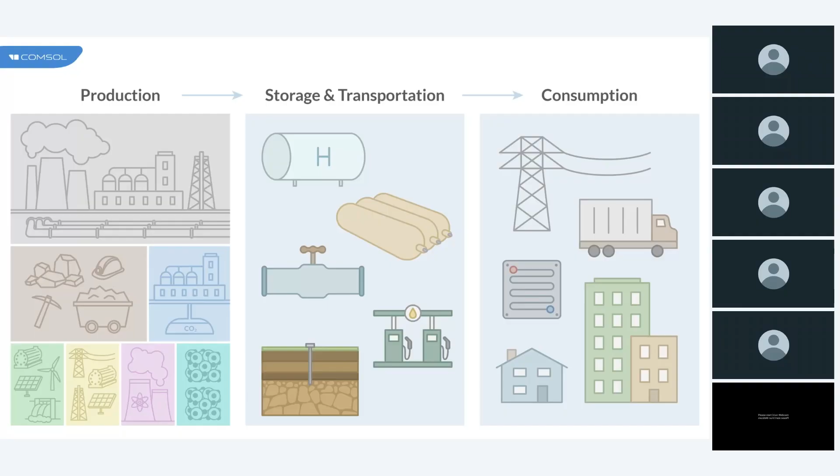There are different types of fuel cells and electrolyzers used in different situations, and each comes with its own engineering challenges. This is where multiphysics simulations become essential.

For example, proton exchange membrane fuel cells are widely used in vehicles and operate at low temperature, but require precise control over flow, water flow, and heat to avoid flooding and drying of the membrane.

In contrast, solid oxide fuel cells work at high temperatures for stationary power. Here we need to handle thermal stress, gas transport, and material degradation.

On the electrolyzer side, PEM and alkaline electrolyzers are used to produce clean hydrogen. They must minimize energy losses and prevent issues like shunt currents, especially under dynamic conditions.

No matter the system, we are dealing with complex interactions of physics: fluid flow, heat transfer, electrochemistry, gas diffusion, and even structural mechanics.

With COMSOL Multiphysics, we simulate all of these interactions together in one unified environment, which helps us design better systems, catch failures early, and reduce prototyping time and cost.

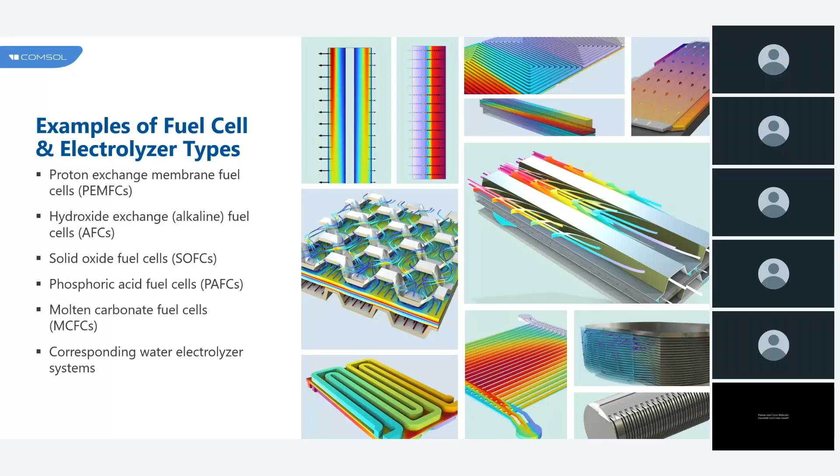For truly understanding and optimizing hydrogen technologies, we need to look at the full picture, from the microscopic reactions happening inside the membrane to the overall behavior of an entire fuel cell or electrolyzer stack. This is where COMSOL Multiphysics stands out, allowing us to model across different length scales, all within a single simulation environment.

First, the unit cell scale: here we zoom into the electrochemical core of the system, where simulation helps us analyze ion transport, gas-liquid reactions, species diffusion, multiphysics flow, and heat generation. We can visualize how each layer - catalyst, membrane, diffusion layer - performs under various conditions.

At the bipolar plate scale, we look at flow field design, optimizing gas distribution channels and pressure drops due to bending pipes, and checking whether flow is uniform or non-uniform. A good design here ensures uniform current density and avoids flooding or dry spots.

At the stack level, the highest level, we simulate the performance of the full fuel cell or electrolyzer stack.

Since modeling every detail at this level is computationally expensive, COMSOL uses smart technologies like homogenization and porous media approximation. This lets us study current distribution, heat and water management, shunt current, and thermal stresses at the stack scale.

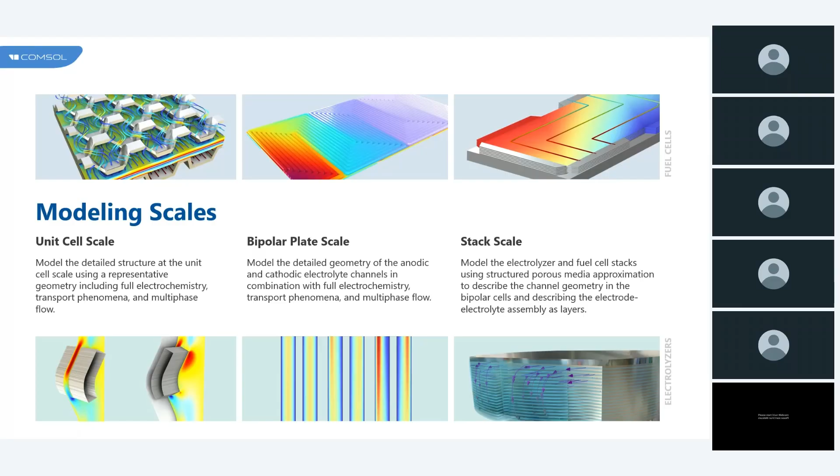Are you working on automotive applications like fuel cell or electric vehicles, or perhaps targeting stationary or power grid systems where fuel cells are used for backup and distributed power? Please select all that apply, and if your use case isn't in the list, feel free to share it in the chat. Your answers will help me tailor the remaining part of the session to what matters most to you. Please participate in that poll question.

Most of the persons have given their answer, and most people are using automotive applications. It's 53% of our audience, and 20 to 23% is stationary and power grid applications.

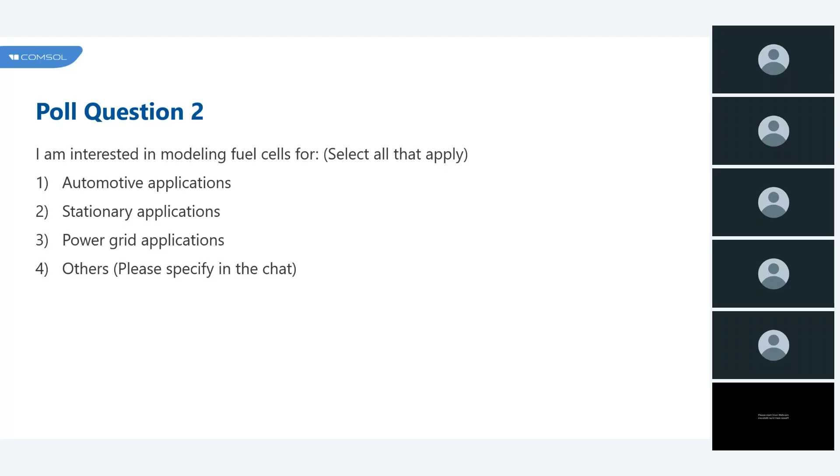Let's look at a common bottleneck in industrial hydrogen production, called shunt currents in alkaline electrolyzer stacks. Alkaline stacks, generally found in fertilizer plants, green steel lines, and hydrogen refueling stations, combine many cells that share the same potassium hydroxide electrolyte. That shared pathway makes the construction straightforward, but it also lets unwanted current bypass the intended electrochemical routes. This parasitic current cuts the efficiency of the electrolyzers, contaminates the hydrogen, and poses a safety risk, especially at high current and temperature.

COMSOL Multiphysics fixes that visibility gap. In one model we can build a full 3D 20-cell geometry. We couple ion and electron transport, gas-liquid flow, heat, and electrochemistry together in COMSOL Multiphysics and pinpoint exactly where the shunt current emerges and why. We can virtually test manifold shapes, isolation layers, and operating conditions before the hardware exists. The outcome is very clear: we need pure hydrogen, higher energy efficiency, safer operation, and a shorter development cycle.

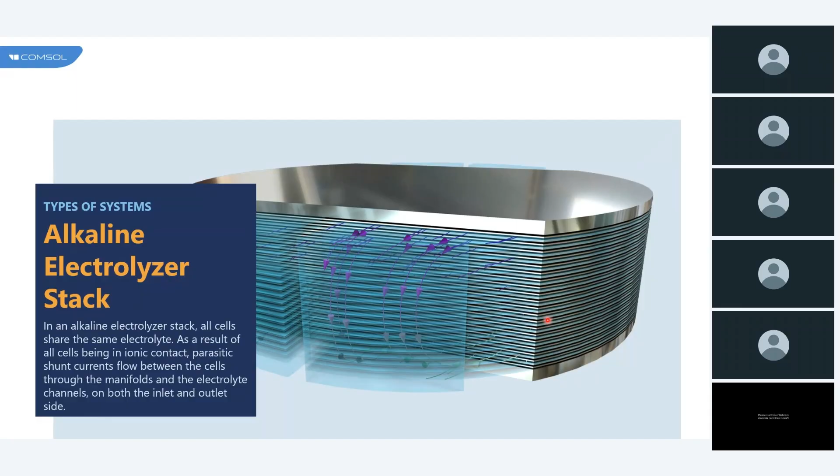Next we will walk you through how we set up that simulation, from the geometry to results.

Here is the full 3D geometry of our alkaline electrolyzer stack. It's a sequence of identical unit cells stretching in the x direction. We can see every layer: cathode, anode surfaces, and separator plates in between, bipolar plates are also there, and the inlet and outlet manifolds that carry the shared potassium hydroxide electrolyte. The geometry is critical because it dictates three fundamentals: how ionic and electronic current flow, the way hydrogen and oxygen gases leave each cell, and where heat accumulates under load.

With COMSOL, we can capture all of this in one model. We can predict hot spots where overheating might occur, detect non-uniform current densities across the cell, and locate where shunt current might form. By building a precise and realistic geometry, we are able to simulate actual behavior.

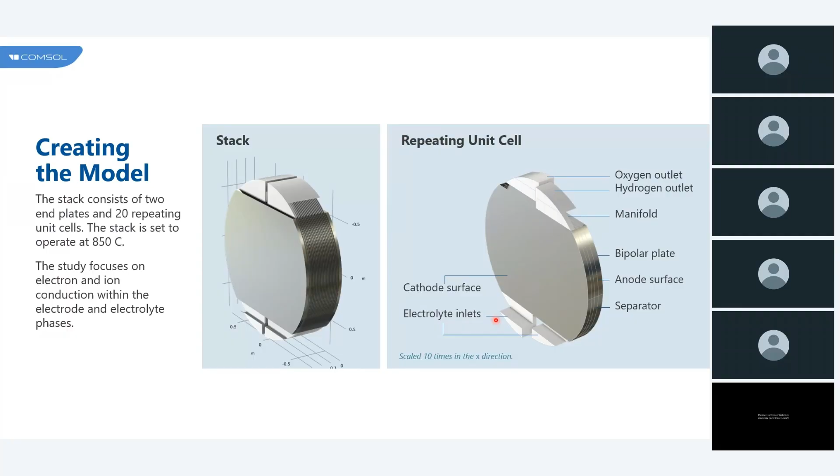Now that the geometry is in place, let's look at the results: current distribution, temperature maps, exactly where shunt currents appear, and how design tricks eliminate them. Now that we've set up the geometry, the next step is to look inside the stack at the electrical behavior that happens during operation.

In COMSOL, we model two main potentials: one is the electrode phase potential, and another is the electrolyte phase potential. The electrode phase potential drives the electrochemical reaction, and the electrolyte potential tells us how ions move through the liquid. By simulating both, we get a full map of where the reactions are happening and how efficiently the current flows.

Ideally, we want a uniform voltage gradient across all cells, but in practice, some areas resist current. These high resistance zones can lead to uneven reaction rates, localized overheating, and reduced energy efficiency. With COMSOL, we can pinpoint these weak hot spots and redesign components like electrodes and separators to balance the current and enhance durability.

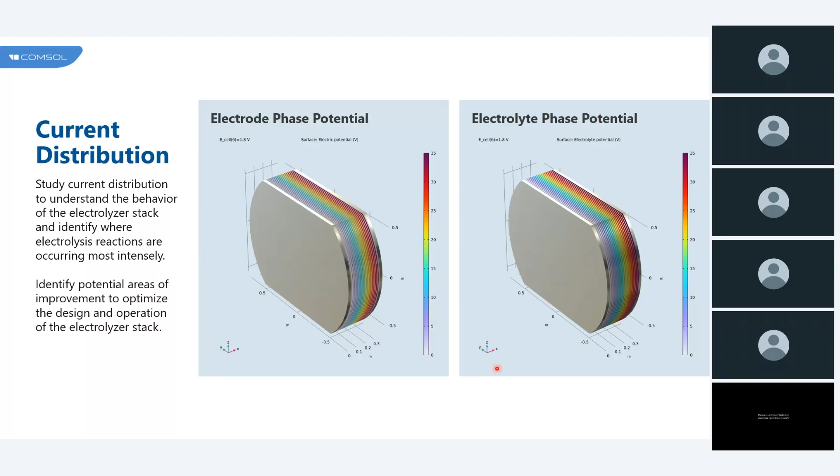This electrochemical modeling step gives us deep insight into the real behavior inside the stack, and sets the stage to study one of the most critical byproducts of the voltage imbalance, called shunt current.

With the electrode and electrolyte phase potential mapped, we can now focus on the major performance issue in the alkaline electrolyzer, called shunt currents. These are unwanted parasitic currents that flow through the shared electrolytes and manifolds, bypassing the intended electrochemical path.

In COMSOL, we simulate how stack geometry, electrolyte conductivity, and manifold flow distribution influence where shunt current forms. Results often show that the lower manifold channel is more prone to these losses, where the voltage gradients and flow paths overlap most aggressively. By adjusting design parameters in the simulation, we can predict and visualize exactly where these losses occur.

This happens well before physical testing, enabling engineers to redesign the manifolds, add insulation barriers, and mitigate unwanted current loops. Ultimately, this improves hydrogen purity, boosts efficiency, and enhances stack reliability.

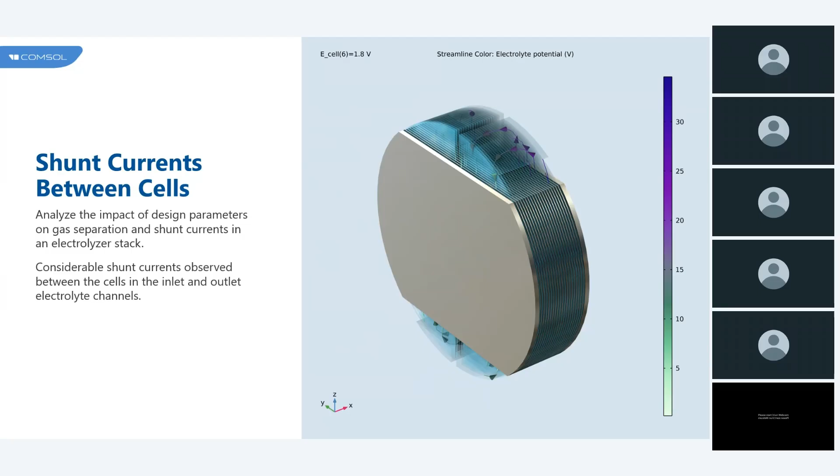Now that we understand where the shunt currents form, let's explore how they affect the overall performance of the system. To evaluate the performance of our electrolyzer stack, we focus on three key metrics. The first is the shunt current.

We track shunt current across each cell operating at 1.8 volts, and the highest shunt currents appear in the lower manifold channels, driven by the strong voltage gradients and uneven electrolyte conductivity.

Looking at Coulombic efficiency, this is lower at low stack currents, where the shunt current losses form a larger percentage of the total current. As we increase the stack current, Coulombic efficiency rises sharply, meaning more current goes toward actual hydrogen production.

Then we switch to energy efficiency. It starts low due to early shunt current and polarization losses, peaks around 1300 amperes where the system operates optimally, and then drops again at high currents due to ohmic and activation losses.

This performance curve gives us a clear optimal operating window, where efficiency, reliability, and cost are balanced. While alkaline systems offer proven performance, we can go further.

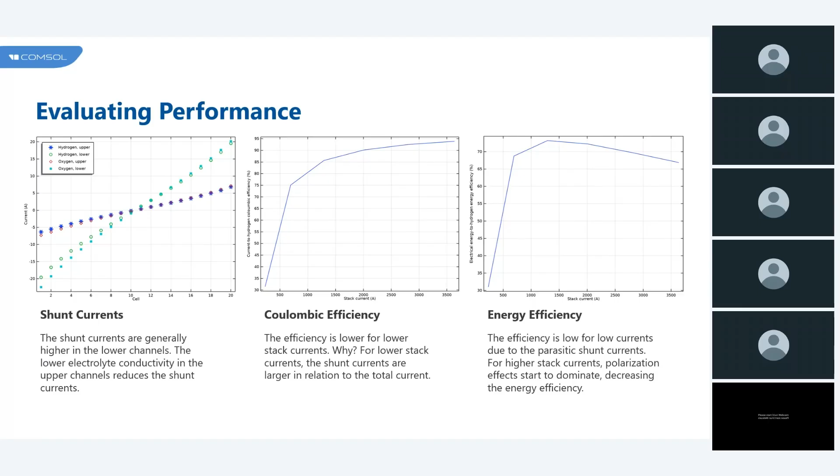To explore higher efficiency and integrated thermal operation, let's shift focus to solid oxide electrolyzer cells, or SOECs. These are emerging as a powerful option for industrial scale hydrogen production, especially where waste heat is available.

SOEC operates at around 800 degrees centigrade, using high temperature steam electrolysis to reduce electricity demand. This makes it highly efficient when integrated with a heat source like refineries, chemical plants, and renewable CHP systems. The ceramic electrolyte moves oxygen ions, not protons.

This means we can co-electrolyze steam and CO2 to make syngas, opening doors to synthetic fuels and chemicals, not just hydrogen.

But these benefits come with challenges: thermal stresses, material degradation, and complex gas flow also occur. COMSOL Multiphysics tackles all of this in one coupled model.

We can map thermal gradients and manage stresses, refine cell geometry to uniform the current densities, and predict long-term degradation and failure risk early, just like before a single part is built.

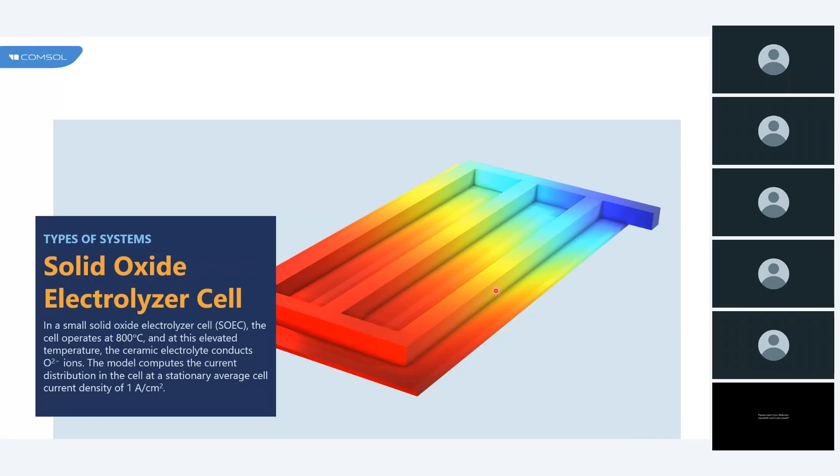Next, let's see how we construct these multiphysics models, starting at the unit cell scale. This is the unit cell model, where we explicitly define our anode, cathode, and solid oxide electrolyte layers.

Here we use ceramic membranes. Using COMSOL Multiphysics, we apply detailed boundary conditions, temperature-dependent material properties, and fully coupled physics to simulate ion conduction through the electrolyte, gas diffusion in the porous electrode, and electrochemical reaction at the interface.

This detailed setup lets us capture key outputs like local potential gradients, temperature fields, and gas species distribution. With this information, we can identify hot spots, non-uniform current density regions, and areas prone to degradation, providing critical insight for optimizing SOEC performance and durability.

Once the unit cell is modeled, we scale to the system level, tracking gas flow, velocity, and species transport under real operating conditions. Next we will see how velocity and gas composition profiles highlight performance trends across the cell.

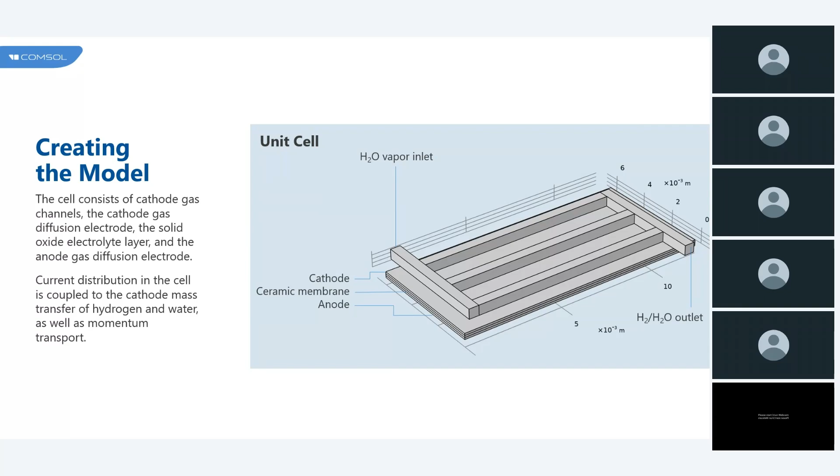Using COMSOL, we map the velocity magnitude distribution within the SOEC cell. Results show lower velocity in the three parallel flow channels compared to the inlet and outlet, which exhibit similar velocity magnitude due to the equimolar nature of the gas flow.

Next we track the molar fraction of the hydrogen and steam. This is the H2O in gas form, and the byproducts along the same path. This reveals how composition shifts as the gas reacts and migrates, and how those shifts influence the local current density.

At different feed conditions, like varying the steam excess or the hydrogen utilization, we observe strong interaction between reactant availability, partial pressure gradients, and reaction zones. These insights are critical for optimizing gas feed ratios, preventing performance losses, and ensuring high efficiency under realistic operating conditions.

Now let's examine how changes in the gas composition, particularly hydrogen concentration, can directly affect the reaction rates and overall cell performance.

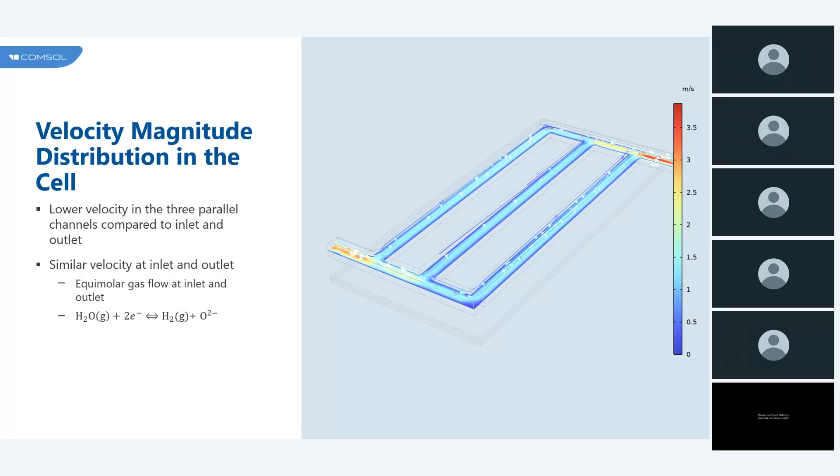This non-uniformity of gas composition and electrochemical activity can lead to performance degradation, uneven thermal and material aging, and lower overall efficiency.

To mitigate these effects, both cell design and system level control must be optimized by adjusting flow field geometry, diffusion layer properties, and reactant stoichiometry to maintain uniform operation.

This underscores the power of detailed multiphysics simulation in COMSOL, enabling better design decisions and improving long-term durability and efficiency of the SOEC.

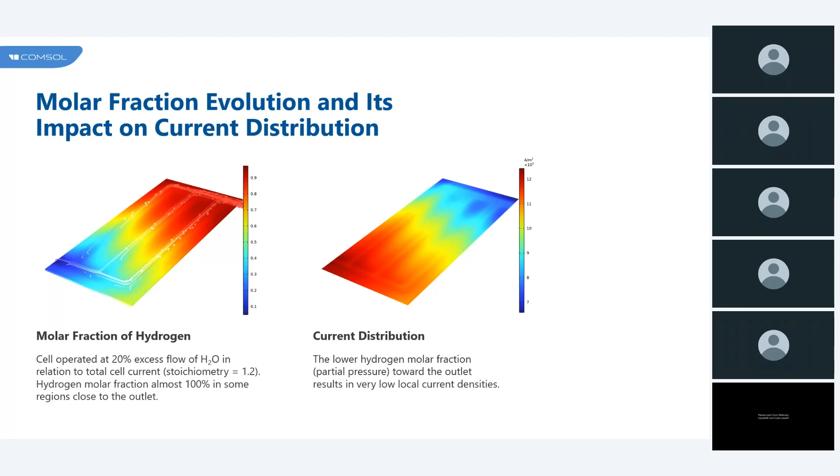Next we will examine how gas composition shifts also influence thermophysical properties and why accurate modeling of this effect is critical. In high temperature systems like SOEC, gas properties like density and viscosity change significantly as the hydrogen and steam ratio evolves along the flow path.

This shift affects the flow velocity and pressure drop, species transport inside the porous electrodes, and overall fuel delivery and reaction efficiency.

If we ignore these effects, we risk underestimating fuel starvation, local pressure buildup, or transport limitations. With the help of COMSOL Multiphysics, the gas properties are dynamically linked to real-time composition, making the model more accurate and predictive.

Having explored hydrogen production with the SOEC...

Let's now shift focus to hydrogen utilization, starting from the PEM fuel cell performance under dynamic and non-isothermal conditions.

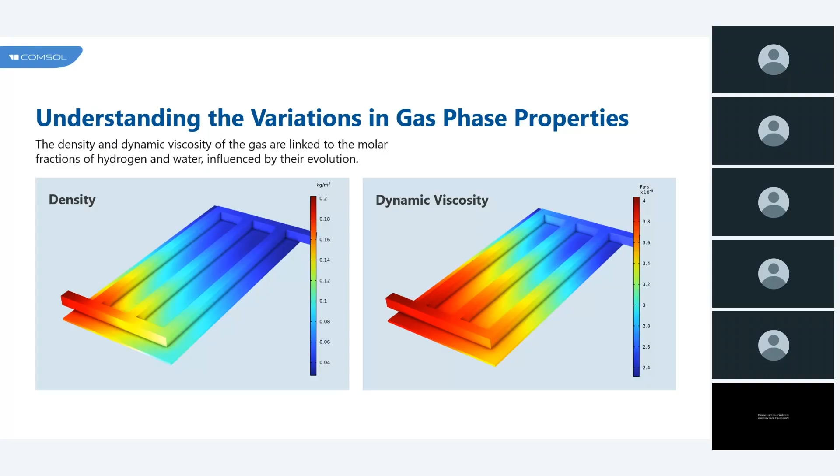This is our third model type. In the first, we saw only the electrochemical part. In the second, flow was included. Now we are doing multiphysics modeling, with electrochemistry, fluid flow, and heat transfer also included in the non-isothermal PEM fuel cell.

Imagine this fuel cell car driving on a hot summer day, and when the driver presses the accelerator, the car needs more power. The fuel cell has to work harder, which means it makes more heat and more water inside.

The heart of the fuel cell is a thin membrane that conducts the hydrogen ions, but this membrane is very sensitive. If it gets too dry, it can't move ions easily and the power drops. If it's too wet, water can block the flow of gases and the reaction slows down.

Keeping the right balance of water and heat is very important. That's why we use COMSOL Multiphysics simulation that includes heat transfer to see how the cell heats up, and water movement, including the water being pulled by the ions, that is the electroosmotic drag.

Another effect is back diffusion, which is the water moving back to balance the sides, and water leaking through the membrane, that is called permeation.

These coupled effects show how temperature and humidity evolve during load changes and how they affect the reaction zone. With this insight, we can optimize humidification strategies and improve thermal controls, and design a PEM fuel cell that stays efficient even in real world driving conditions.

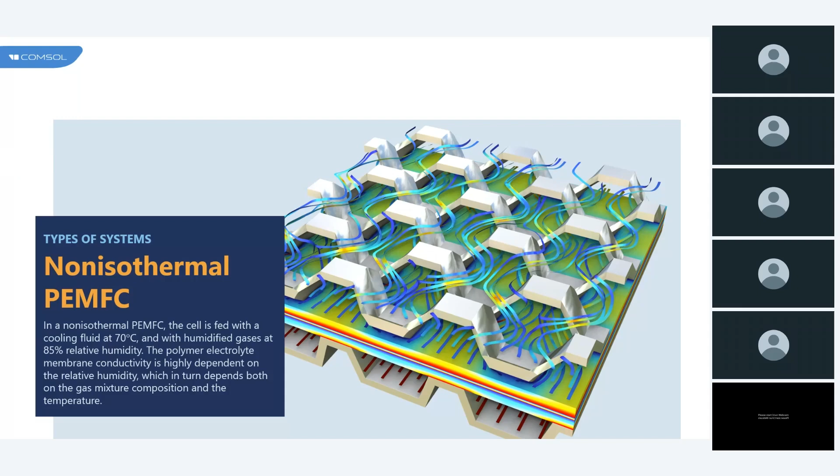Now let's explore how we build this detailed multiphysics model in COMSOL. Again, we create the understanding of the PEM fuel cell in detail.

We model every critical layer in one COMSOL model. This is the membrane electrode assembly, called the MEA, where the electrochemical reactions occur.

Another one is the cathode GDL and anode GDL, the gas diffusion layer, to move gases in and liquid water out. Flow channels distribute the reactants uniformly, and cooling channels remove excess heat under load changes.

So all these parts interact, so we use a fully coupled multiphysics approach, including heat transfer, gas and water transport, and electroosmotic drag. This unified model predicts the power output and maps the temperature and humidity inside the cell, showing how those conditions affect proton conductivity and overall efficiency. With these results, engineers can fine-tune the material, layer thickness, and channel geometry for designing PEM fuel cells that run cooler, stay hydrated, and last longer.

Now that the complete cell is modeled, let's examine the key electric behaviors, specifically how voltage varies across the different layers and what that means for performance.

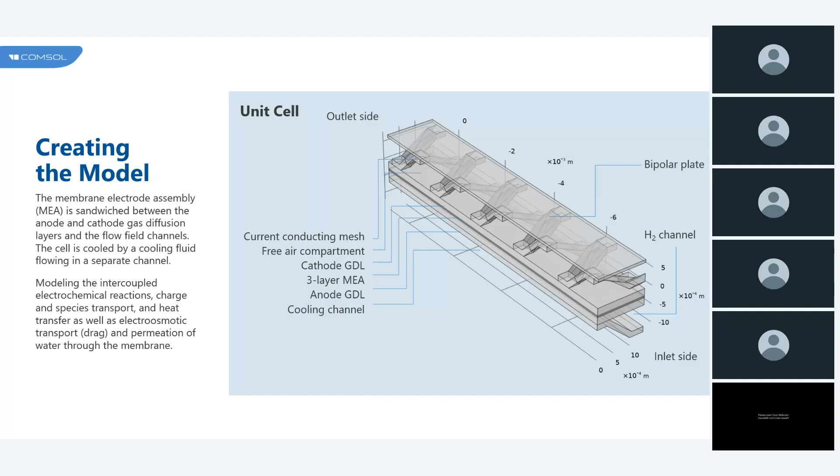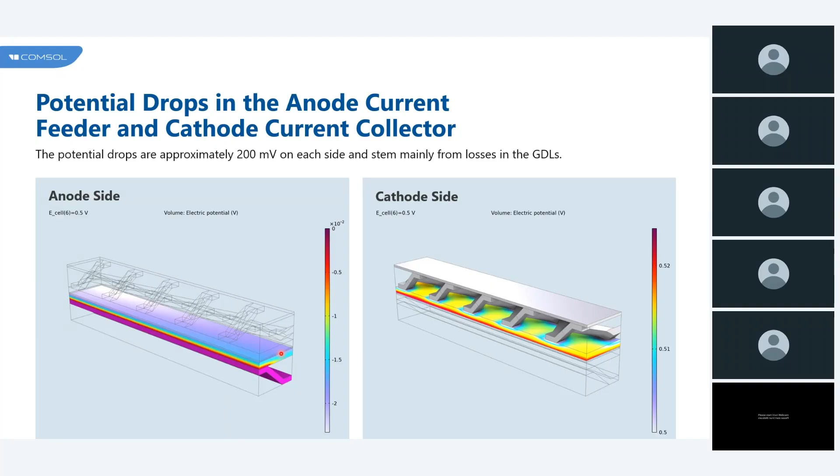Besides these electric losses, heat builds up inside the fuel cell, which plays an important role in its performance and durability. Let's see what the model reveals about the temperature distribution.

If we don't manage this heat well, it can dry out our membrane and damage it. This causes uneven current flow, making the fuel cell wear out faster. By studying both the electric and thermal details, the model helps us design better cooling paths, choose materials wisely, and build more reliable fuel cells.

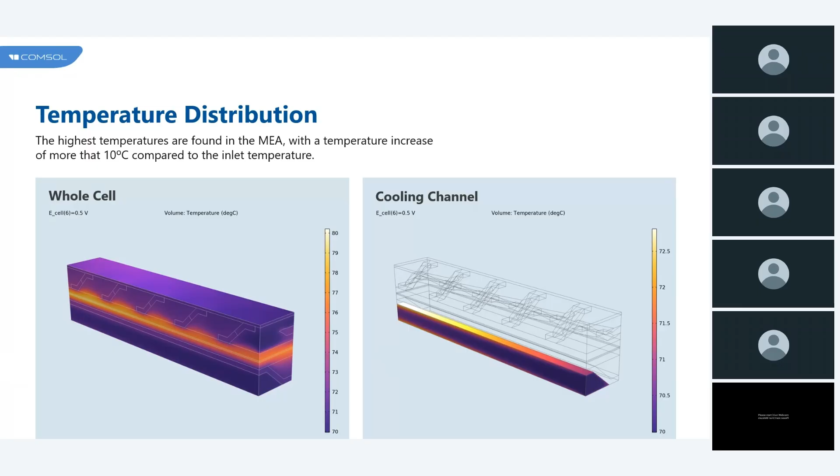Understanding this is key for designing humidification systems and flow field layouts. By knowing how water builds up inside the cell, engineers can adjust the gas flow, modify the channel design, or change operating conditions to keep the fuel cell working efficiently and avoid problems like flooding or drying out.

So far we have focused on the single cell PEM fuel cell, but in real applications, cells are stacked together to deliver higher power, which brings new challenges, especially with temperature and water management across the whole stack. This is our fuel cell stack.

When multiple PEM fuel cells are stacked, keeping each cell at a similar temperature is very important. If some cells run cooler or hotter, water vapor condenses unevenly, causing performance differences that lower stack efficiency and reliability. Cooler cells can be flooded with water, blocking the oxygen needed for reactions, while hotter cells may dry out, damaging the membrane over time. These problems shorten the fuel cell stack's lifespan.

To address this, we use COMSOL Multiphysics to model a detailed 5-cell stack, including heat generation, water and gas movement, cooling flow, and electrochemical reactions. We tested different flow designs like straight, serpentine, and bio-inspired patterns, and the results show which layout spreads heat evenly and improves water management.

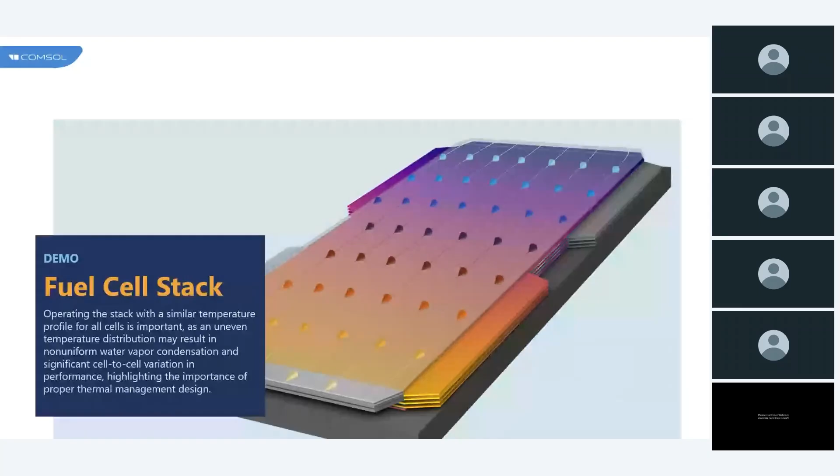Now that we have seen the importance of temperature and water balance in the fuel cell stack, let's look at how we model this complex interaction in COMSOL. Before starting our demo, we'll showcase some results showing what actually happens inside that fuel cell stack.

So this is the model which is representing the 5-cell PEM fuel cell stack, and each cell is separated by the bipolar plates that also serve as channels for liquid cooling.

Inside COMSOL, we simulate several key processes all at once, including the temperature changes inside the stack, electrochemical potential in both the electrodes and electrolytes, mass transport of gases like hydrogen, oxygen, and water vapor or steam in each compartment, and fluid flow and pressure in both the gas and cooling channels.

The COMSOL Model Builder makes this workflow smooth. It brings together geometry setup, physics definition, meshing, solving, and visualizing the results in one place. This multi-physics approach helps us better understand how different parts of the stack interact, so we can make better design decisions and build a more efficient, longer-lasting system.

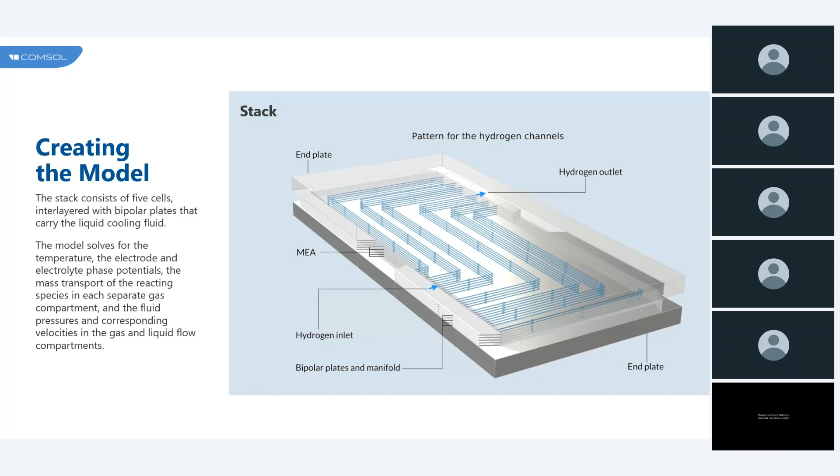So this is what our COMSOL looks like. Give me permission to share my screen again. So this is our COMSOL GUI.

So when we started our COMSOL Multiphysics GUI, here we can see the example of the stack cooling PEM fuel cell.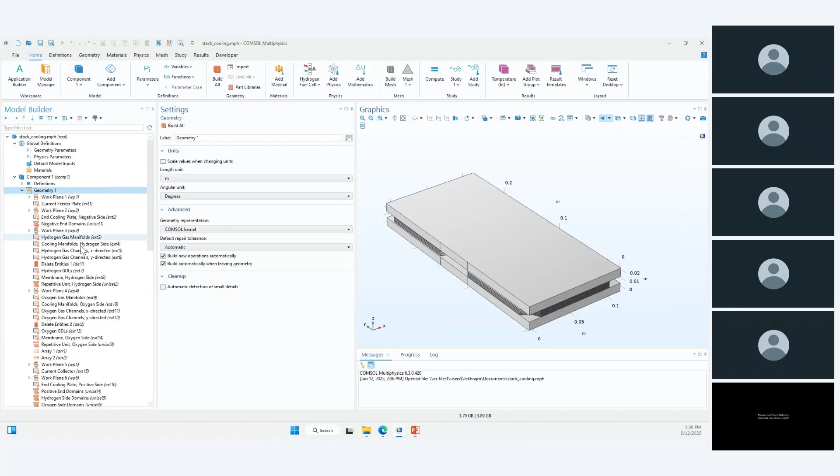In the geometrical parameters section, we can put all our parameters here, and we use the same thing in the geometry section. This geometry is built in COMSOL itself.

If you want to import your geometry from any CAD software, we can directly import it from another CAD tool. So I will showcase that.

When COMSOL launches, our GUI looks the same, and you can either go with the Model Wizard or the Blank Model. Generally we select the Model Wizard.

In the Model Wizard, you choose which kind of fuel cell or which kind of modeling you want to do, from 3D to 0D. For now I choose 3D, and for the PEM fuel cell I want to use fluid flow, the multi-phase flow.

In the multi-phase flow, I have two-phase flow in the phase field, so I choose the phase field here. This is the laminar flow, and I want heat transfer too, so I choose heat transfer from the non-isothermal flow, and my model will be ready.

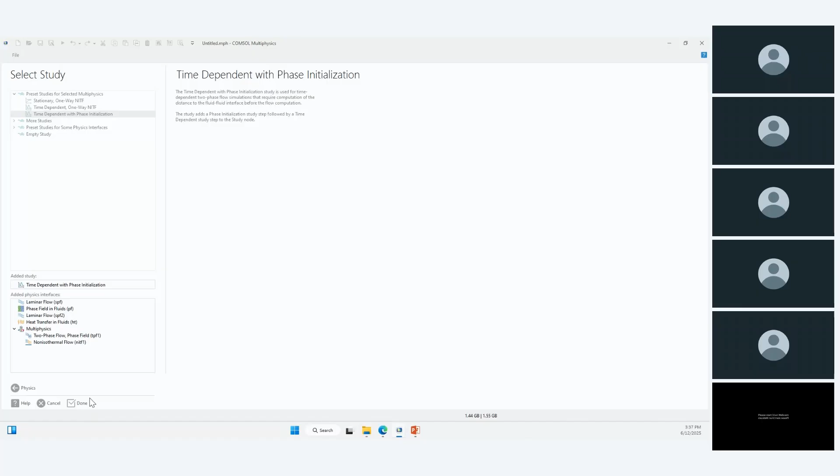After the physics are selected, we go on to select the study, whether it's time-dependent or stationary. I choose the time-dependent study with phase initialization, and after that we click Done. With this, our initial GUI looks like this.

Initially your parameters are not estimated yet. If you want, you can either directly import from any CAD file, or we have different kinds of models we can directly import from other CAD tools.

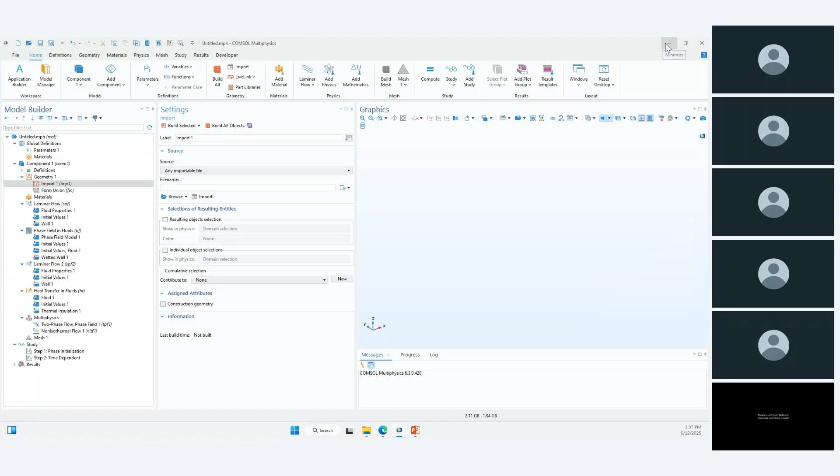After the model import, you can build the geometry. After building the geometry, we have to assign our material.

For materials, COMSOL has a dedicated library. You can choose directly from battery, electrolyzer, electrode kinds of things, or a dedicated fuel cell library is also available. In the fuel cell library, aqueous alkali, molten carbonate, polymer electrolyte, and solid oxide are all available, so we can choose material directly from the library.

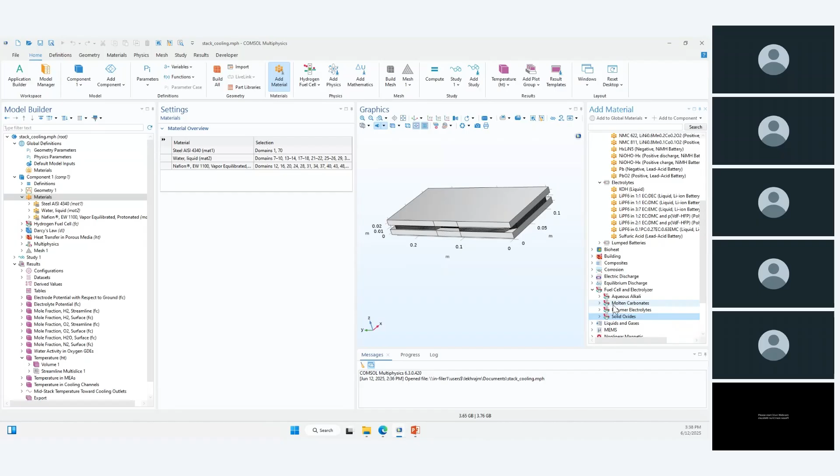For now we are choosing steel as the outer body, water liquid inside our membrane, and one is Nafion, vapor equilibrated. So that's how we choose the material.

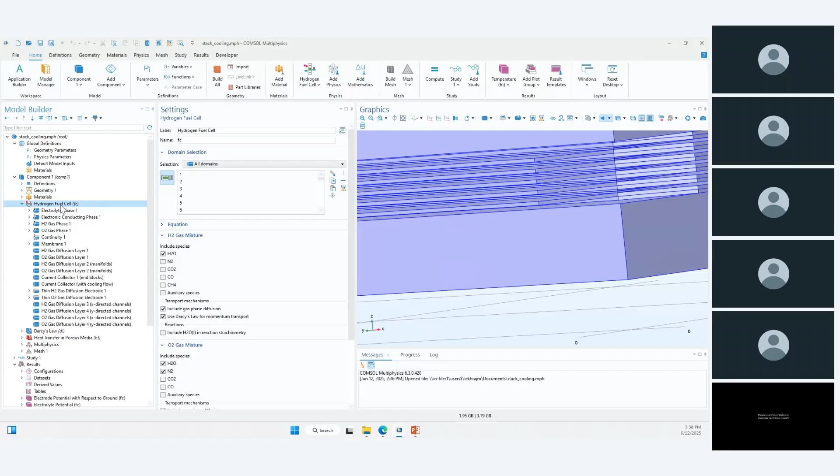After choosing the material, we select our physics. One of the physics we're using is the hydrogen fuel cell, which allows the electrolyte phase, and which kind of electrolyte is here. From the zoom we can see we're choosing the stacks, and you can see it clearly here.

To edit anything, like the electrolyte conductivity, from the material - whatever material you choose and assign, it comes directly from the material, or you can change it by user-defined input instead.

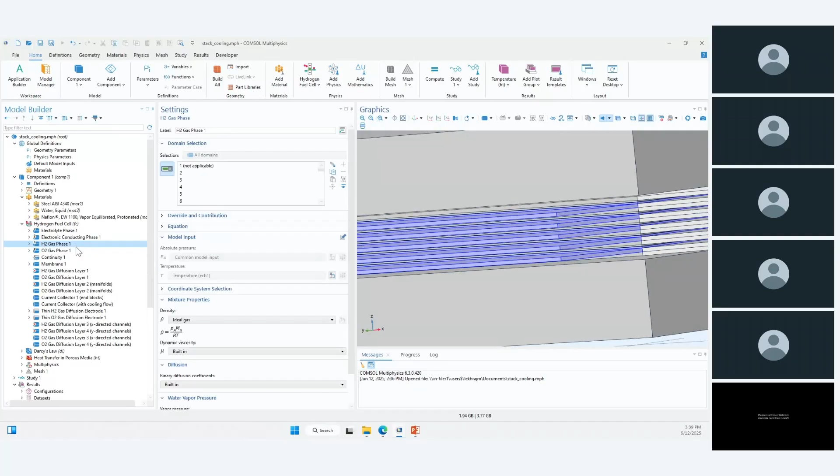After that, electronic conducting phase, and which kind of hydrogen phase - H2 - and oxygen we can assign in the physics term. This is called the graphics window.

In the middle is the setting window, and this is our model tree builder. So after setting up the hydrogen fuel cell physics, we look like we just need pressure only.

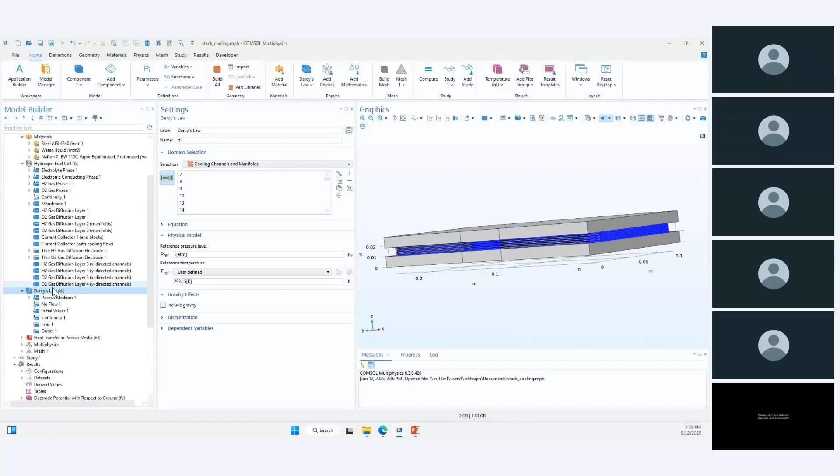So for the pressure, we have to solve Darcy's law because our membrane is porous. That's why we are choosing the porous medium. So I have to select the porous media, where is the fluid, where is our membrane. So we can choose directly by Darcy's law.

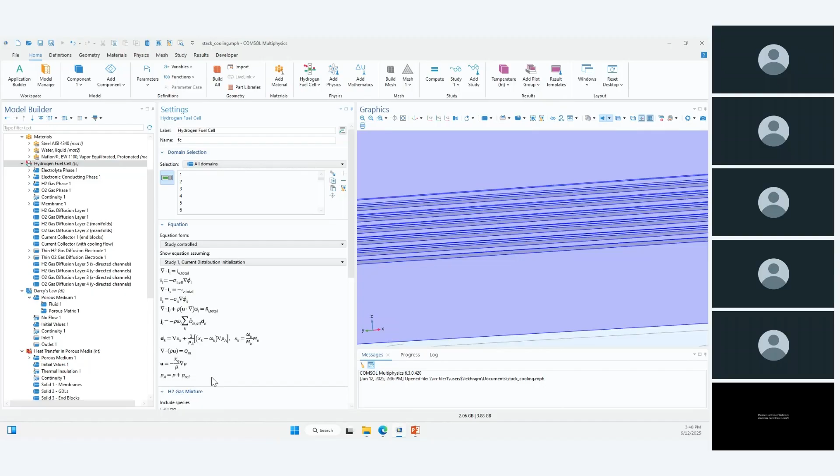And I need to see the heat effect also, and heat effect is in the porous media. So we have dedicated physics to solve in the porous media, and which equation is solved by COMSOL we can see directly. So here is our equation for the hydrogen fuel cell, which kind of equation we have to solve, and similarly for Darcy's law we can see which kind of equation we have.

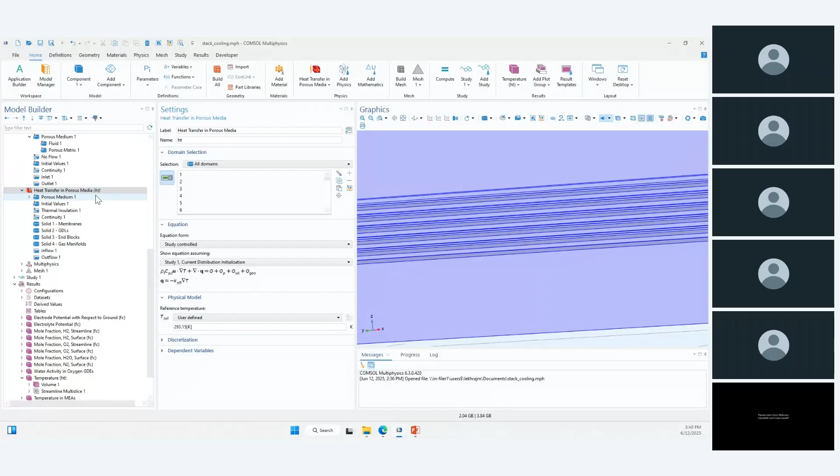So this is the part of the physics. In the heat transfer, again we can see our equation, which kind of energy equation is solving in the heat transfer in the porous media. For the porous media, we have a dedicated node which allows you to select where your porous media is, we have to assign it. And we can see the name - this is our membrane, GDL, and end blocks. This is in the end.

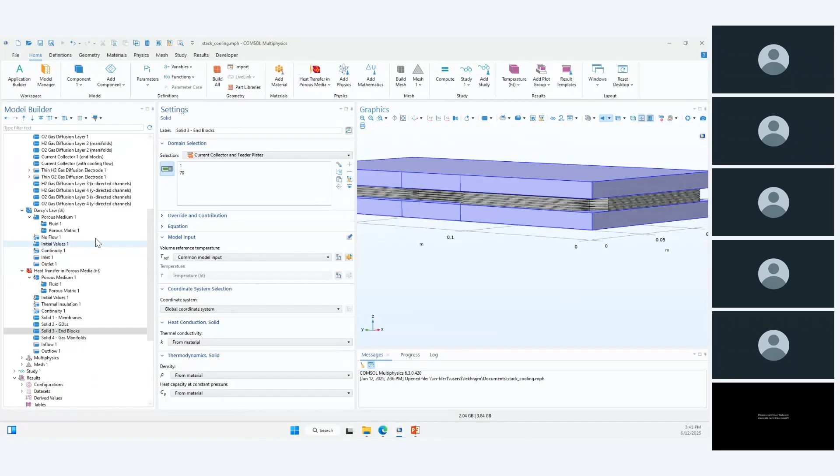So after setting up this geometry, material, and physics, we have to select the multiphysics nodes. In the multiphysics, we see which equations we are solving together. So first we can see the coupled interface - one is the electrochemical solved together with the heat transfer. So we select the electrochemical physics, and here is the heat transfer. With the coupling of both, either it will be one-way coupling or two-way coupling, we can do the same thing.

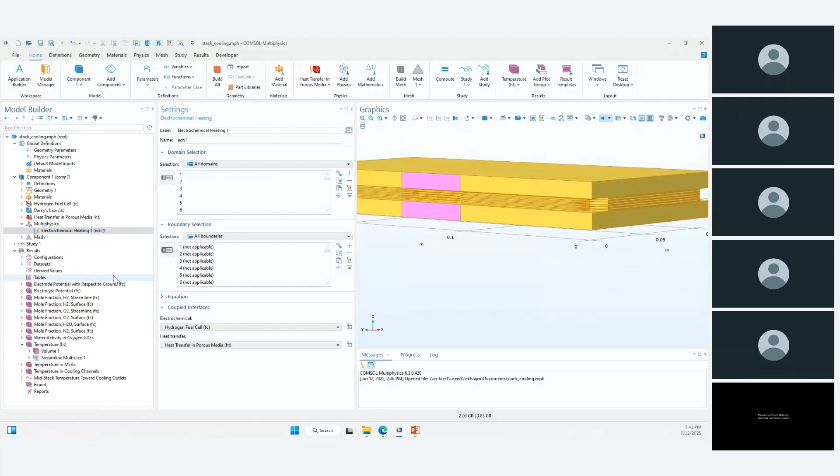And in the geometry parameter, I showed you earlier. So in the setting we can see the parametric study also. In the parametric study, we can solve the parametric sweep. This allows you to choose which kind of parameter you want to sweep.

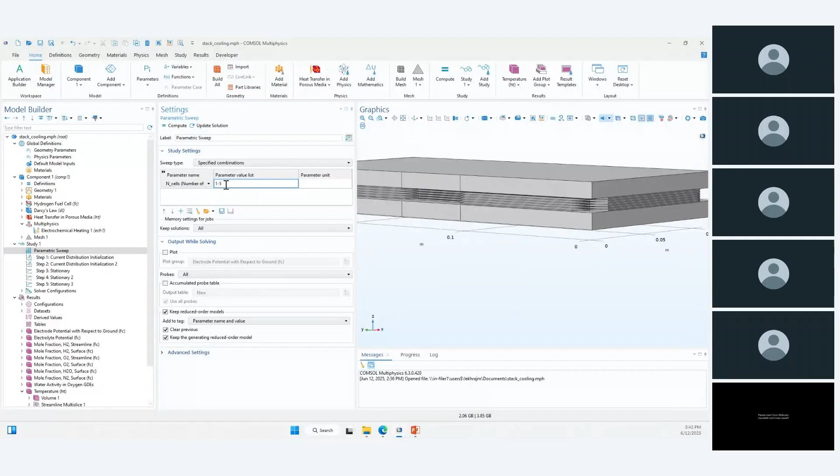Suppose our unit cell thickness - if this unit cell has n number of cells, say 5, we need to change the number of cells to 5. So we just type here, n_cell is number of cells, so I want to check from 1 to 5. COMSOL itself gives the result for number of cells 1, 2, 3 up to 5. So we have to define that. This is called the parametric sweep.

And mesh count also plays an important and crucial role in any software. So COMSOL gives you the option of user controlled mesh and physics controlled mesh. If you select physics controlled mesh, COMSOL takes care of all physics based controlled mesh. So we can do the mesh.

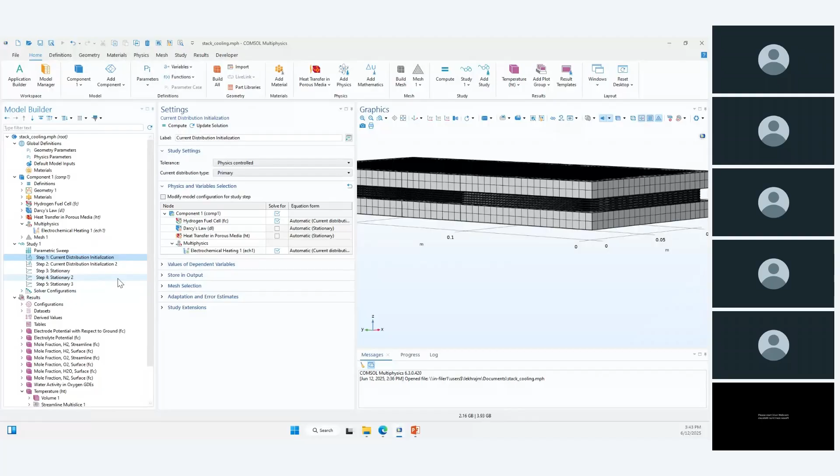After the meshing, we switch on the study. In the study, the first study is for the current distribution. So here we are doing the stationary solving, and we do not go into the solver settings, we just jump to the result. Post-processing itself happens in COMSOL itself. So we can see here the electrode potential with respect to the ground.

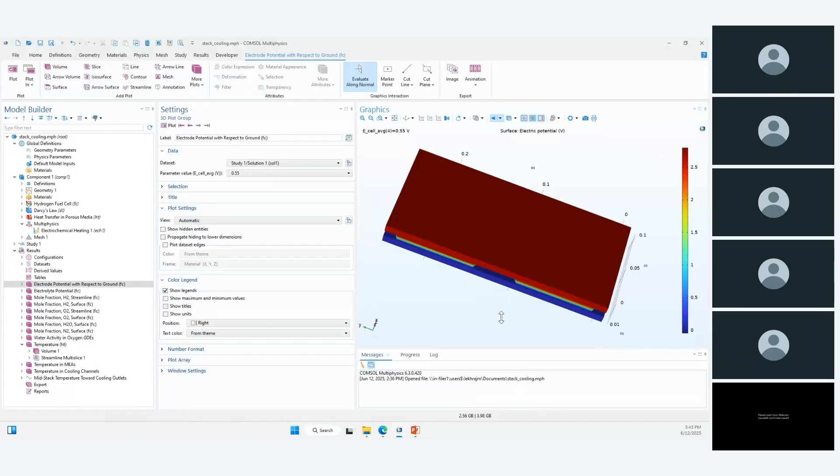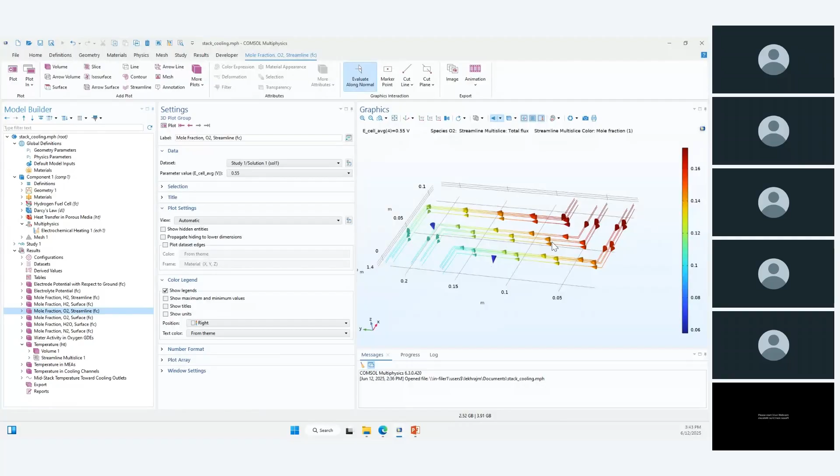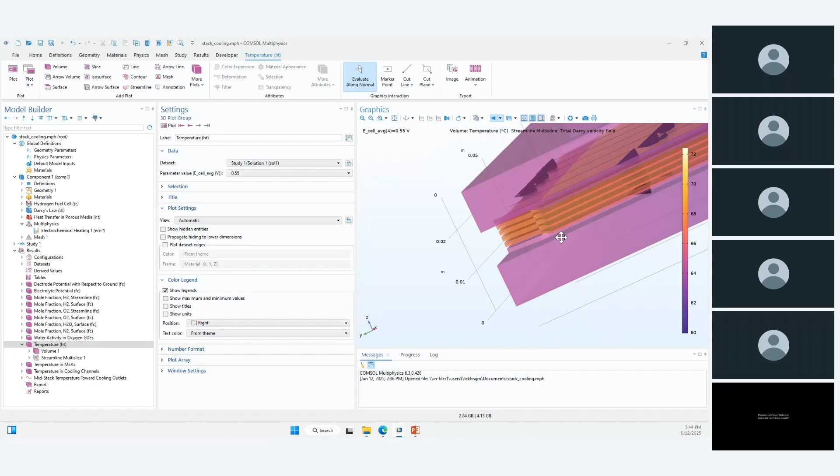And water activity in the oxygen, we can also see in the post-processing results. Temperature plays a very crucial role in it. So we can see which kind of temperature is in every stack cell, starting from here to here, from inlet to outlet. We can see which kind of temperature we are getting, and in the cooling channel, what is the status of the temperature. So we can see this in the post-processing itself.

So for the fuel cell stack modeling, this is a very big advantage. We can see easily, including complex features like porous electrodes, gas diffusion layers, and cooling channels. We also couple multiphysics like heat transfer, electrochemical reaction, gas transport, and fluid flow within the same model. So the platform supports parametric study too.

Like I told you earlier, things like flow rate, channel size, or material properties can be changed without rebuilding the model from scratch. Once the simulation runs, the post-processing tool allows you to create clear visualizations like temperature maps, current density plots, or flow streamlines that reveal what's working and what needs improvement. So this is a flexible all-in-one workflow which saves time.

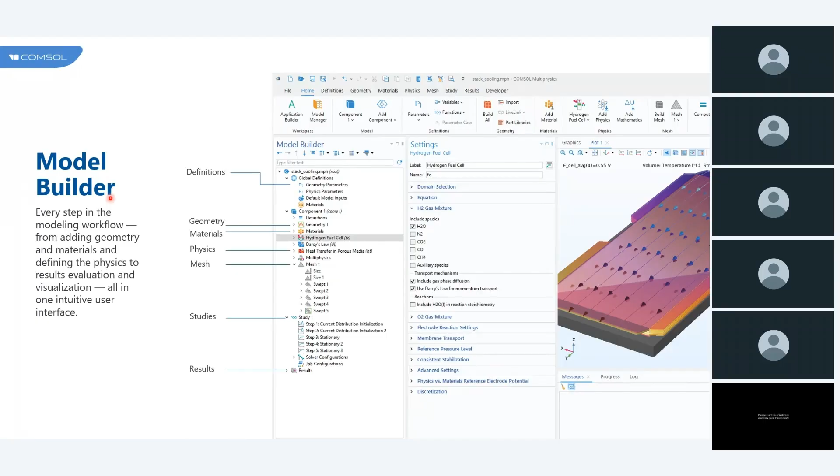One of the biggest advantages of simulation is being able to test and refine designs virtually, without having to build multiple physical prototypes. For example, imagine an automotive company trying to reduce the weight of a fuel cell system without losing thermal performance, instead of manufacturing several versions of the cooling plate. They use COMSOL to simulate different geometries and flow paths to save both time and cost.

In electrolyzer development, researchers have also used COMSOL to explore how membrane thickness and electrode structure affect gas crossover and efficiency. This kind of insight helps guide material choice before anything is built.

Simulation isn't just about design, it's also about durability. We can virtually test how the system responds to rapid cycling, start and stop conditions, and stream loads, helping engineers catch reliability issues early. This kind of virtual prototyping shortens the development cycle, improves product reliability, and accelerates innovation.

Now that we've seen how simulation helps us optimize individual fuel cells and stacks, let's look at how this approach is accelerating innovation at the industry level. We have one of the user stories I told you before, from the auto industry, because many of us are interested in the auto industry. So here's how Toyota is using simulation-driven design to rethink fuel cell technology.

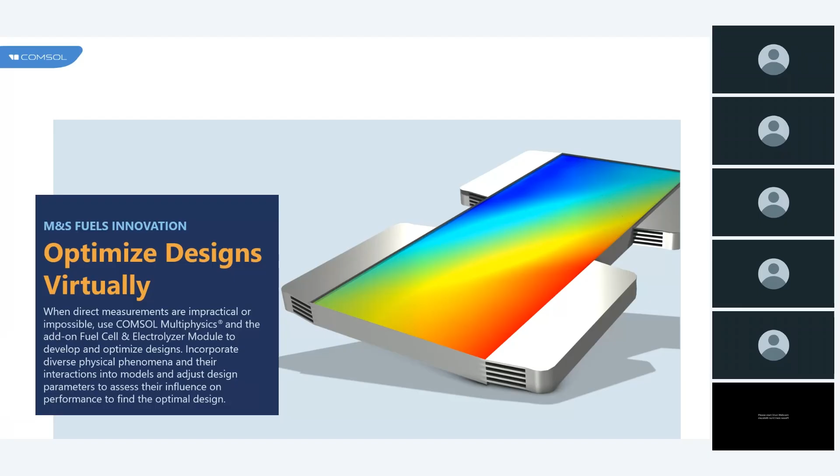Let's take a real world example that shows the true power of simulation, and this comes from Toyota. In most traditional PEM fuel cells, gases are distributed through straight or serpentine channels, which are easy to manufacture, but come with serious trade-offs. They can cause uneven gas flow, water accumulation, and higher pressure losses, which ultimately hurt fuel cell performance. So Toyota engineers took advantage of COMSOL Multiphysics and rethought the design using a method called generative design.

This method is inspired by nature, thinking about the branching patterns of leaves, lungs, and blood vessels—mimicking nature's inspirational structures, systems that evolved for efficient fluid distribution.

Using this nature-inspired approach, Toyota generated four new flow field designs with microchannels optimized for even gas distribution, better water removal, and lower pressure drops. The results were impressive.

These new designs outperformed conventional ones in simulation, showing improvements in reactant distribution and even better power output. When they built a real prototype and tested it, the experimental results matched the simulations—a perfect validation. This case highlights a key message: simulation doesn't just help us tweak what already exists, it enables true innovation.

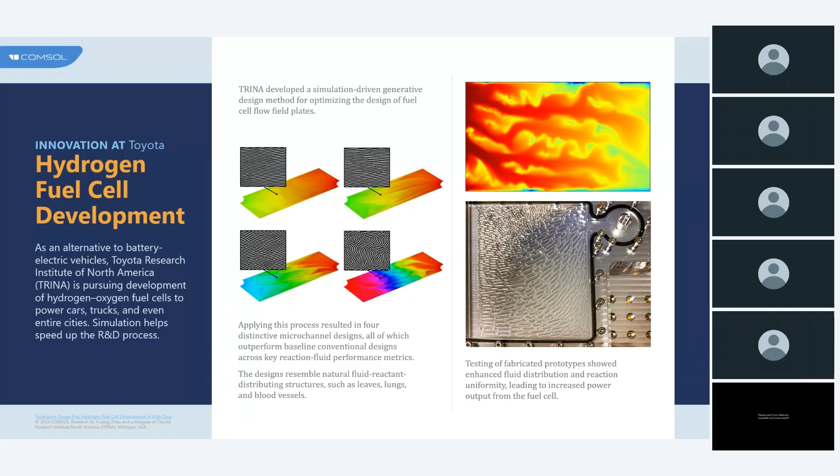With the help of simulations like COMSOL, we can design better, smarter systems from scratch. Companies like Toyota can move quickly from bold ideas to working products, cutting development time, improving performance, and staying ahead in the hydrogen race.